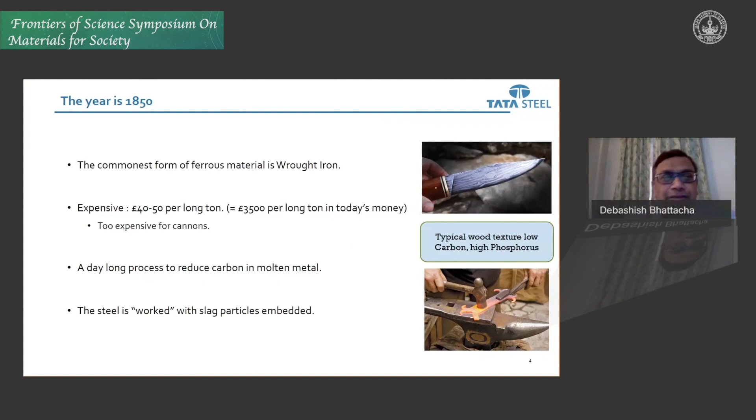And in 1856, after years of work, Henry Bessemer filed a famous patent of the Bessemer converter, which took anywhere between 5 to 10 tons of liquid iron, and you could blow air through the bottom of that vessel, and the oxygen in the air decarbonized the melt. This process revolutionized steelmaking. It brought down prices from £40 to £7. It reduced manpower significantly. And lo and behold, before the turn of the decade, this steel was being used in artillery. And of course, people don't stand still. They kept on making innovations and modifications to the process.

There were the Gilchrist cousins who made a major modification to Bessemer's original idea, which used clay as an internal lining. They replaced clay with dolomite and lime, which instantly increased the array of raw materials that this particular process could handle. And just to make a point here, having basic refractory lining meant that you could deal with phosphorus in the hot metal, and it meant you could use lower priced high phosphorus ores for making steel.

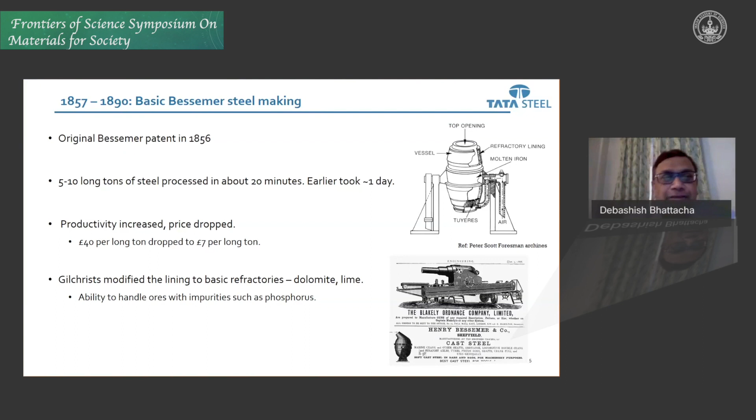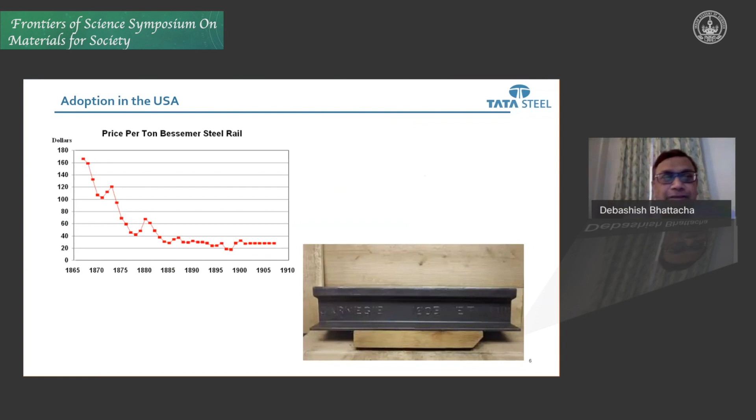But of course, like everything else, even technologies have decline and demise. The major issue with the steel that came out of the Bessemer converter was nitrogen. You could not have access to pure oxygen, although the inventors and the innovators knew that pure oxygen was the answer. It just was not commercially available at scale and at that time. And this nitrogen caused brittleness.

And therefore, the world of steel transferred itself back to a puddling-like process where you take a pool of molten iron and you puddle that iron so that the liquid iron gets exposed to air and gets oxidized, and it was called the open hearth furnace. So there was a period of about 50 years when Bessemer converters went out of vogue.

The open hearths came in, and by the 1940s, driven again by a war, oxygen became commercially available at scale. And lo and behold, there was a Bessemer-like process that came in, which was the Linz-Donawitz converter, which was the oxygen blast at 4 or 5 Mach from the top using a lance. That came in and ruled the world for the next 50, 60 years.

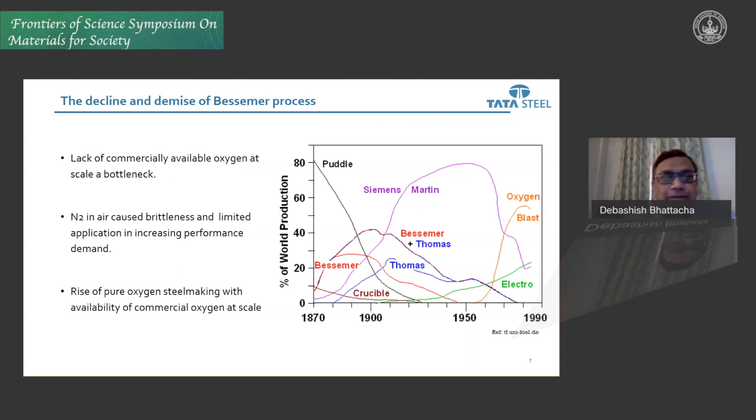So if we step back and look at the evolution of steel making over the last 150 years, the developments were driven by external factors. Wars in the UK, the railroad expansion, essentially expanding into the heartland of the US, productivity and cost post Second World War, and looking forward, any change coming up will be driven by environment. Deep decarbonization is the way forward for the steel industry.

Just to give you some figures, for every ton of steel that is made in an integrated steel plant today, the sector produces 2 tons of carbon dioxide. So for every ton of steel, there is 2 tons of carbon dioxide. The world makes 1.6 billion tons of steel. That's 3.2 billion tons of carbon dioxide. That's no way to go forward. So going for deep decarbonization, which means going to net zero CO2 footprint, is the way forward.

And essentially, there are 2 routes. One is to capture the CO2 that is coming out, because you cannot just wish it away with all the expensive assets that are in place. So CO2 capture at scale. And when I say at scale, a typical integrated steel plant would be about 10 million tons annual capacity, which would be producing about 20 million tons of CO2 per year. And we would need to capture 20 million tons of CO2.

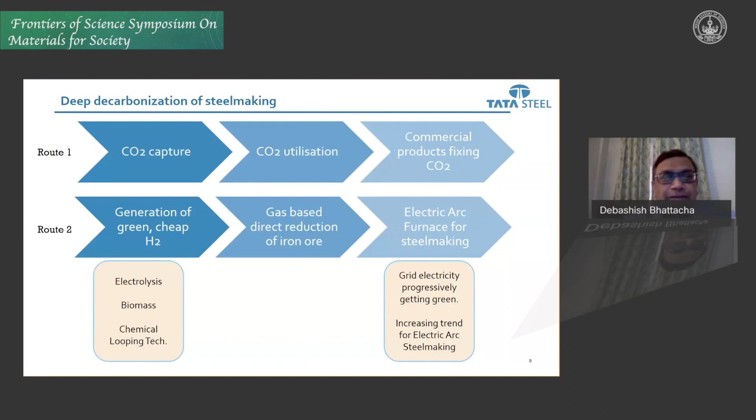So you can see a full picture of how steel making changes about every 50 years. And unlike the past, where you could associate the changes in technology with individual names, Bessemer, for example, going forward that would not be the case, because the technologies are getting complicated, because you would need expertise from multiple other domains. So what would be available for a Bessemer in terms of resource would be tenfold more complicated for a researcher or a technologist today.

So it is not only resource, it is also addressing the scale. So as I mentioned, CO2 capture and utilization at scale for hundreds of million tons of CO2 is not trivial. And just to take an example, if you convert the CO2 of a 10 million ton plant, that's 20 million tons of CO2, into, say, polycarbonate, it will flood the market of polycarbonate in the world. It will crash that market, and it will have no economic value, and therefore will not be a worthwhile product to make. Just to give one example.

So there will be needed multiple technologies. So it is just not one person, one expertise that could come up with multiple solutions for just one route, that is carbon dioxide capture and use. You would need polymer scientists, you would need biologists, you would need, of course, chemical engineers and metallurgical engineers to work together across multiple

industries and academia. Just to take an example of hydrogen, if you need green electricity at low cost, the scale at which hydrogen needs to be produced, just for 1 million tons of iron, which is a very tiny steel plant, is about 0.6 billion normal meter cube. That's about 54,000 tons of H2 per year. So you can imagine how, if the grid doesn't have green electricity, you would need multiple other sources, other technologies to produce cheap green electricity.

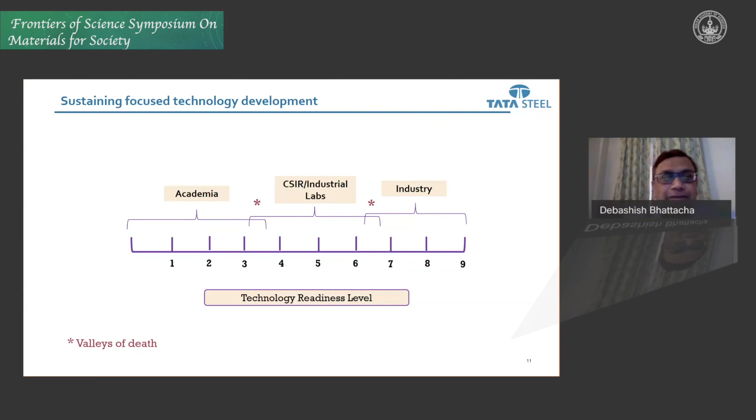And whatever policies we put in place at the national level or at the industrial level or the sectorial level need to take conscious cognizance of the fact that there is a finite valley of death at these crossovers. I'll talk a little bit more with some more examples as we go along.

Let's take carbon fiber, a more recent material compared to steel. The first carbon fibers, of course, appeared in the 19th century, but really in the form of structural material, it was formed out of rayon in the 1950s, and out of polyacrylonitrile, that is PAN, which is the most commonly used raw material for carbon fiber, it came out in the 1960s. In the 1970s and 80s, it saw use in defense and a bit in Formula One cars. And it was not till the middle of the 1990s, more like 2000s and later, that carbon fiber saw increased adoption in multiple industries, including wind, a little bit in automotive, and also in sports goods.

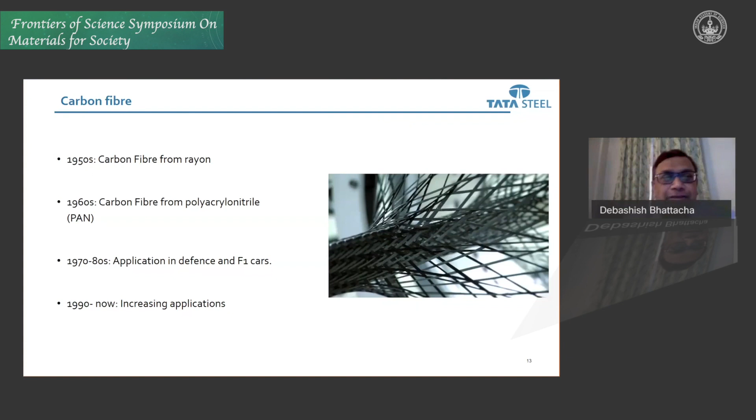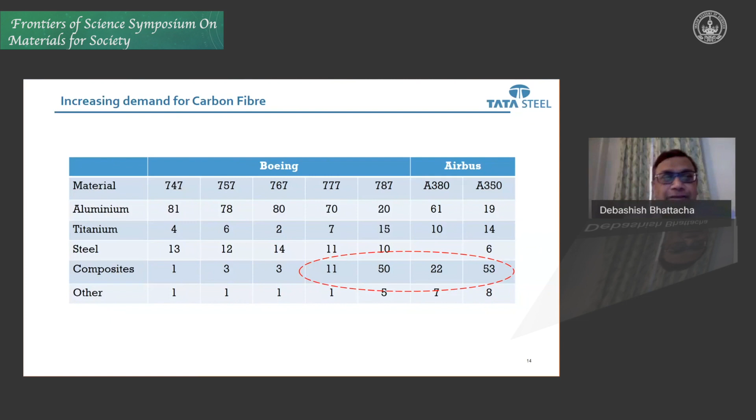This and adoption of this material in wind energy, in sports and automotive, as I've said, has driven the volume demand for carbon fiber, which has been good. It's grown at 4 times the average GDP growth rate of the world. And driven by this growth and volume, the price of carbon fiber has come down.

At one time, carbon fiber was selling at $100 per kg. It is now $20 per kg. If it comes down to about $10 per kg, in my opinion, we will see large adoption in automotive, which will again be a sort of a hockey stick event for growth in demand for carbon fiber.

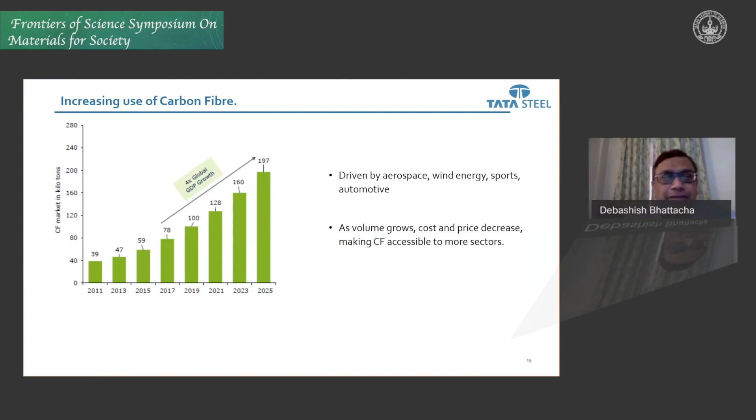Let's look at the India scenario, and I am going to be focused a little bit in a biased manner on the Indian scenario for advanced materials. India today consumes about 750 tons. The M here doesn't stand for thousand; it stands for metric, which is less than 1% of global consumption. So it's a really tiny market compared to the globe.

However, for defense and for aerospace, this is a very strategic material for the country. With this sort of a market size, it is very difficult to get industry interested in putting up production bases. More so because the technology for producing carbon fiber is heavily intellectual property protected by a few large companies, both in the East and in the West.

But there is opportunity for India as a nation to build strength in this very strategic material, carbon fiber. If you look at the cost breakup of carbon fiber, a large part, more than 50%, is in the precursor, which is PAN, polyacrylonitrile. And there's a significant portion in labor. In both these cases, India can have opportunity, and I'll show you how. Of course, labor is an easy guess, and I will not harp upon it. Let us look at precursors.

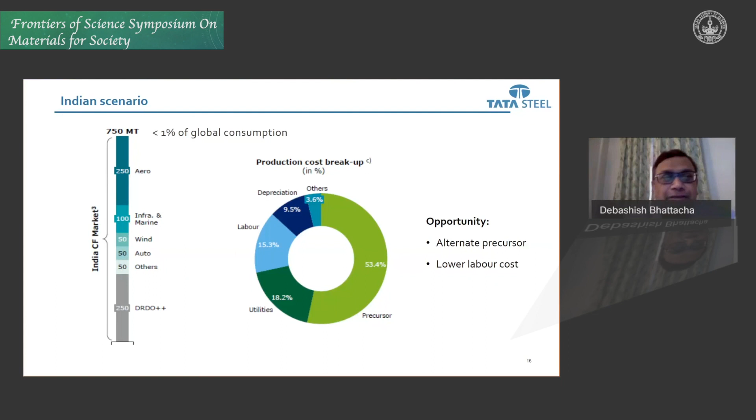The traditional precursor PAN has been worked upon, researched, and developed over the last 40 years. And no wonder that the products and the applications of carbon fiber that we see today are tailored to the properties of carbon fiber that you get once you use PAN as the precursor. So on the left is the PAN-based precursor production route, and on the right is the alternate to PAN, which is coal tar pitch.

Now, India today is on the verge of being the second largest steel producer in the world after China. India is today producing 105 million tons, and it's increasing in capacity every year. It has a target of going to 300 million tons. Now, coal tar pitch comes out of the coke making process. So this is a material that is indigenous, and the raw material would not be dependent on imported precursor, which is a product of petrochemicals, and India is not large on petrochemicals.

The production route would be different because it is a different starter material. You will need isotropic pitch. You will need some heat treatment to make mesophase pitch, which will be melt spun and then converted to carbon fiber. This technology is nascent. Only very few companies in the world have tried producing carbon fiber in this technology, and of course, it has not got much attention in terms of research and development.

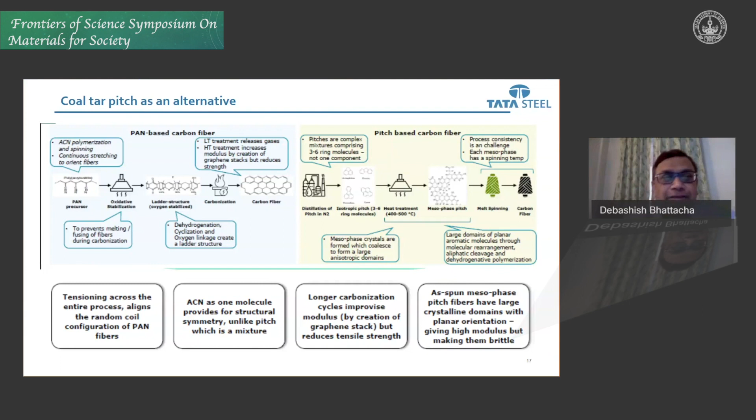Of course, the nature of the material is different. It is not as uniform as the material produced from acrylonitrile. It is a mixture of various carbon phases. But then this is the opportunity that India has to carry out its own research and development, produce this and master its own technology, where with 300 million tons of iron and steel, it would have its own precursor base.

But if you look at the ecosystem in India for carrying out this true TRL work on carbon fiber, if you start with the basic knowledge, there is hardly any research group in India that works on carbon fiber. And therefore, there are very few research fellows. The number of PhDs are small. That's a gap. There's only one pilot in India, which is at the National Aerospace Lab in Bangalore, which has been working on it for the last 25 years. There is expertise there, but it works on PAN precursor.

Manufacturing, India has none, and of course with reason. But then, if India has to take leadership in a material that is strategic, it needs to relook at the enablers which will incentivize industry to put a manufacturing base in India, right? And that is market. The Indian aerospace and industry market does not really pull carbon fiber today. And it is a bit of a chicken and egg because carbon fiber is expensive.

Aerospace in India is small. The other sectors don't need or don't want such an expensive material. We need to look at this whole value chain differently. We need to have a national focus on developing the market for carbon fiber and treat the world as the market, with India as its manufacturing base.

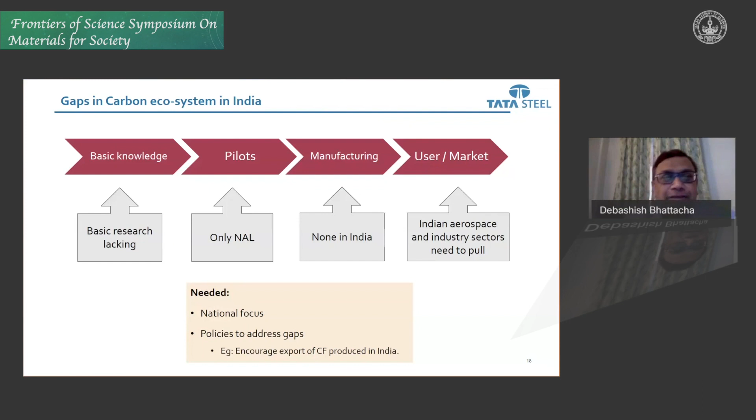We need to address the gaps through policy. We should encourage, for example, carbon fiber export, and carbon fiber that is produced in India to be exported. Essentially to create a market for producing in India and drive research and pilot plant for pitch-based carbon fiber making. Use pitch as a raw material for carbon fiber, and the carbon fiber with capability to get into aerospace and industrial products.

I'll give an example of graphene, and Phil is very well versed with graphene being in Manchester; both the Royce Institute and the two graphene institutes, of which they are neighbors, are world leaders in graphene. But I'll give you an example of how creating an ecosystem, not necessarily in a nation, but even in an industry, can accelerate adoption of a material. So Tata Steel has its own patents in graphene production, and we produce graphene from two sources: graphite and seedlac. Seedlac being a plant product which is quite prevalent in the eastern part of India.

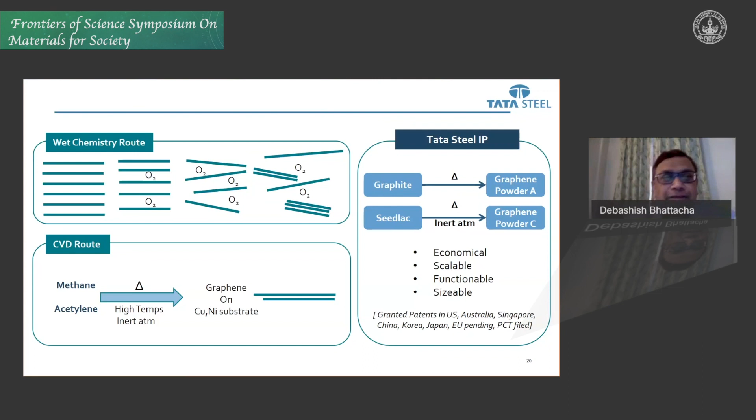And we have used graphene commercially now. I'm just fast forwarding 5 or 6 years. Our first patents came out in 2011, 12, 13, that sort of time. And in 2017, we set up the graphene business. And today we are commercially selling graphene-based products. Graphene goes into screens for handling raw materials. They get into conveyor belts, which increase life of conveyor belts by about 3 times. They get into hybrid idlers, again, idler rollers for conveyor belts. Life has gone up by 3 times.

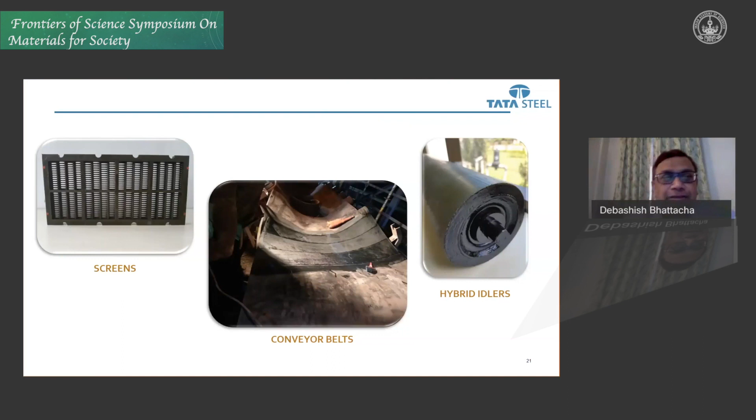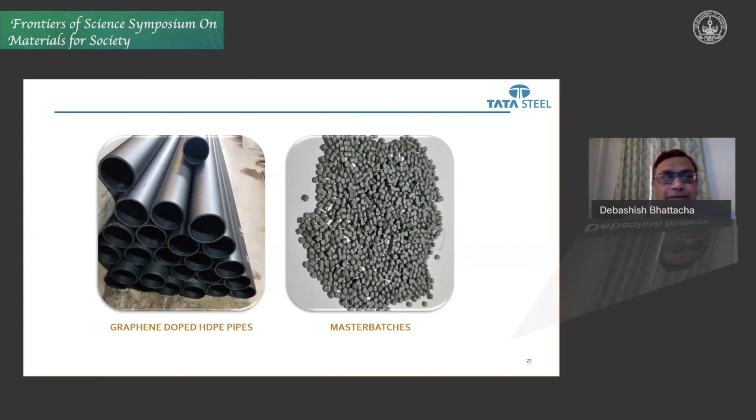We are now putting graphene into HDPE pipes for conveyance. We're making graphene for master batches that could go into rubber and polymers. We're using graphene as coating on steel, especially rebars, to give them limited period surface corrosion protection. We put doped graphene powder for coating of tubes, and we are producing graphene aerosols for spraying on metallic surfaces and also on textile surfaces to give hydrophilic and hydrophobic properties.

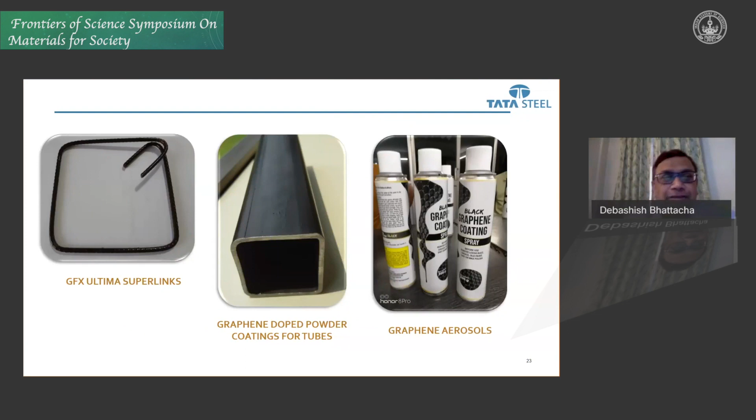We see graphene can address a large market if it gets into products. And these markets could be in hundreds of millions of dollars. We are currently setting up a plant which is 100 tons per annum capacity and will be inaugurated this December. Hopefully, COVID will subside to enable us to inaugurate that. And we are exploring markets which are large, for example, in apparels, in packaging, and energy.

Now, all this development within, say, 7-8 years of filing the patent and going commercial has been done in an ecosystem created within the company, which traversed the entire TRL level from 0 to 9. So this was possible because graphene was new. You could create a niche and a protective sort of umbrella in which this was incubated and grown. But it can't be done for a large number of advanced materials. For that, you need the nation to have focus.

Let me give some indications of my thoughts as to what needs to be done at a national level. We need to be able to promote market for advanced materials. We cannot create markets suddenly, domestically. So we need to have export incentives to treat the globe as the market. We need to ensure focus through themed public funding. There are examples across the world of how certain areas are given public funding for countries to gain dominance and proficiency in those materials across the TRL levels.

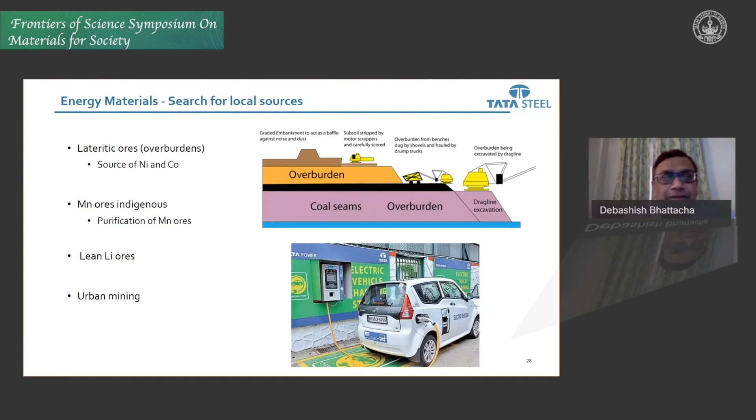I talked about the need for government, industry, academia, MSME to work together. It's like the triple helix, the government, industry, academia working together. But unlike the double helix, which is autonomous and can drive a system, the triple helix needs to be driven, right? So we need to find who leads in this triple helix system. It could be the industry, it could be academia, it could be the government.

And I think the debate is on, and the discussion is rife as to who bells the cat in this triple helix system. But the triple helix is absolutely needed for us to create a robust ecosystem going forward.